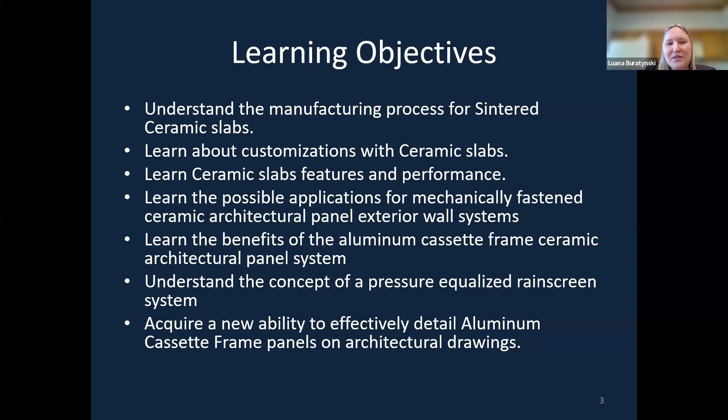In our objectives, we're going to learn the manufacturing process for sintered ceramic slabs, customizations with ceramic slabs, features and performance, possible applications for mechanically fastened ceramic architectural panel systems, benefits of the aluminum cassette frame which I mentioned before, and understand the concept of a pressure equalized rain screen system and the ability to effectively detail aluminum cassette frame panels on architectural drawings. So I'm your presenter today.

Thanks, Mark, for your introduction. I'm a huge CSI supporter. I am a certified technical rep, so it's the Canadian equivalent of the CCPR exam, but I will be taking that in my future.

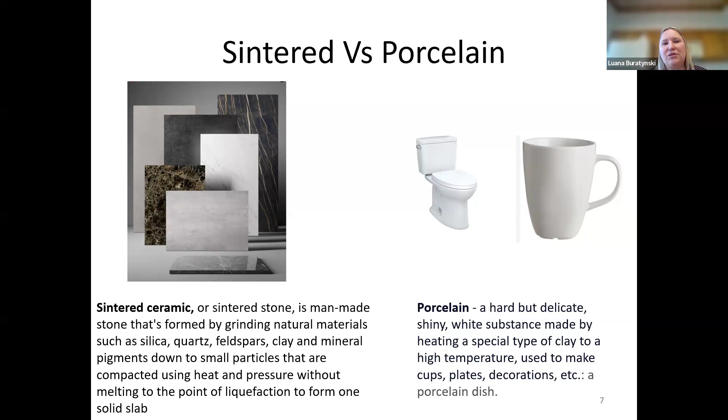When we look at porcelain, we think of a hard but delicate, shiny surface - heating a special type of clay at high temperatures used to make cups, plates, decorations, toilets, mugs - and they do shatter; this is more of a robust surface. So I want to make clear the terminology used when writing specifications: sintered versus ceramics and porcelain type slabs.

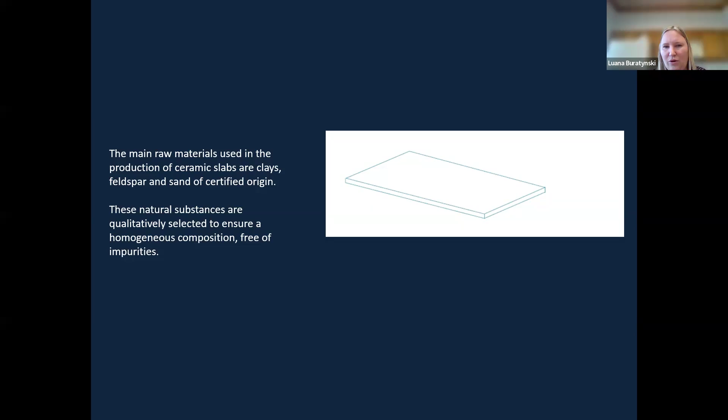Just to show you the process here: raw materials are used in the production of ceramic slabs are clays, feldspar and sand of certified origin. I'm going to show you the technology of the slab.

I'm going to load this up here. Make sure we get the video, and I hope the sound can play through. Get it another way.

I'll get back into the video once it loads, but for timing I'll show you how it's processed in the actual 10-step process.

The raw materials of silica sand, feldspar, mica, and recycled stone are all put in the milling process, where atomization mixes all the rocks and minerals together, and then they put it through high pressure pressing. There's trimming and drying, decoration with the printer, and firing of the kiln, and the final process is producing a reinforced fiberglass mesh backing behind it for quality control in the slab.

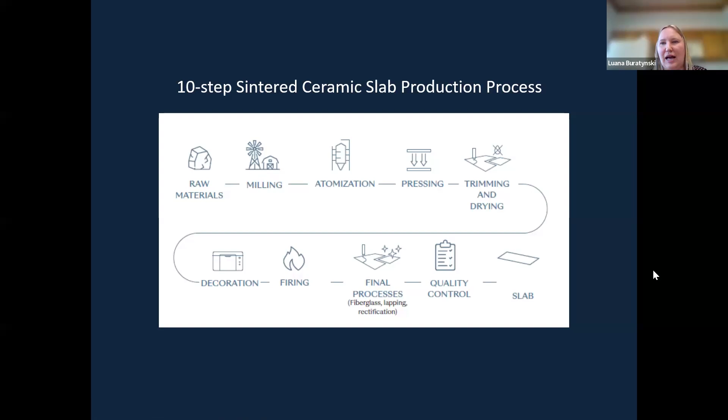What's great about this is a lot of quarries are being shut down in Europe for environmental concern reasons. This is something made from 20 to 60% pre-consumer recycled content. So in terms of LEED and environmental product declaration, this is more of a sustainable renewable material than actually using natural marble and stone from quarries - we're using a recycled process.

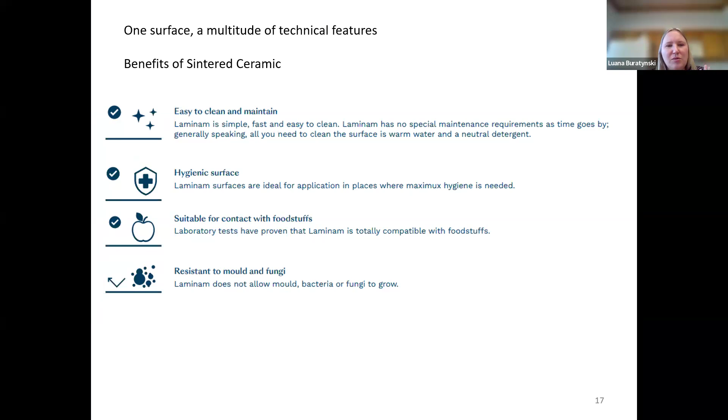The benefits of this type of material: it's easy to clean and maintain, hygienic surfaces, suitable for contact with food, laboratory tested, compatible with foodstuff, resistant to mold and fungi. This does not allow mold, bacteria, or fungi to grow on it. It's an impervious surface, just like glass, with a porosity averaging 0.1%.

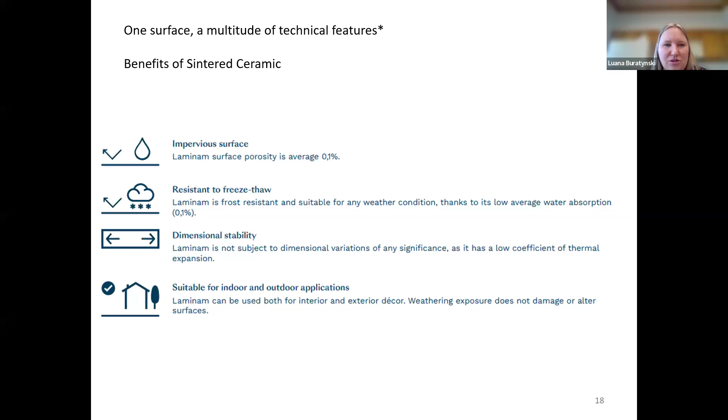Resistance to freeze thaw, especially in colder climates, suitable for any weather condition, thanks to its low average water absorption rate. Dimensional stability - it's a super flat surface with a low thermal coefficient of expansion, suitable for indoor and outdoor applications. You can consider this product in bathrooms, stalls, wall cladding, in interior and exterior applications. Weathering exposure does not damage the surface. Resistance to heat, so it's non-combustible. The ceramic surface does not contain any organic materials, so it's not altered in case of direct contact.

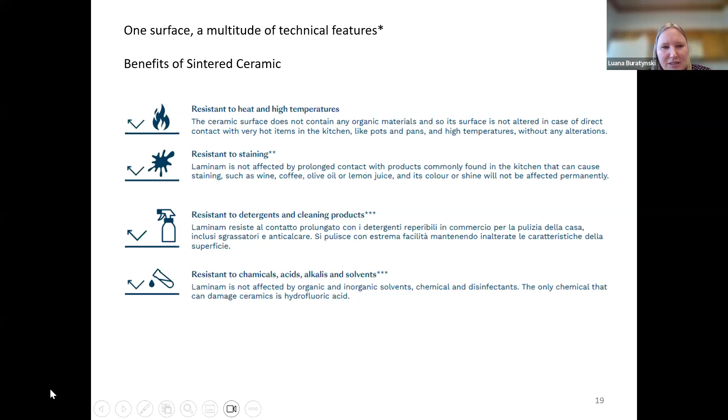This has the ULC 135 test. Resistance to staining, it's not affected with prolonged staining, and graffiti, so that includes like a wine spill, marker, spray paint. Resistant to detergents and cleaning products, so it just needs limited soap and water detergent to wipe off some of the stains that get put on it. And resistant to chemicals, acids, and solvents that could happen on the facade.

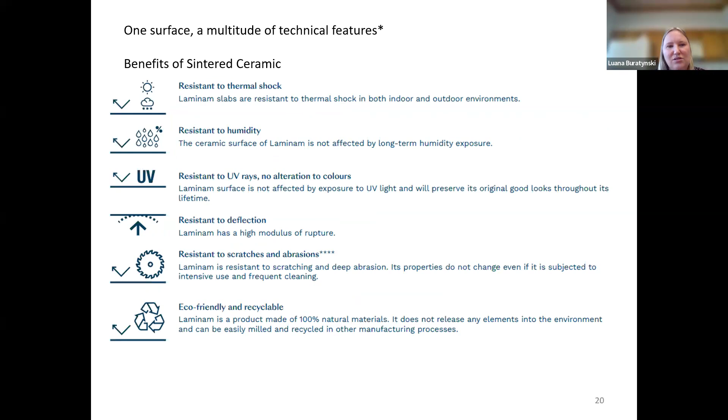So thermal shock is another one. Humidity, which is great, there's so many. UV resistance, so the color does not fade. There's a guaranteed 25-year warranty pass-through, but the color stays together. Resistance to deflection, scratches, abrasions, and it's eco-friendly and recyclable.

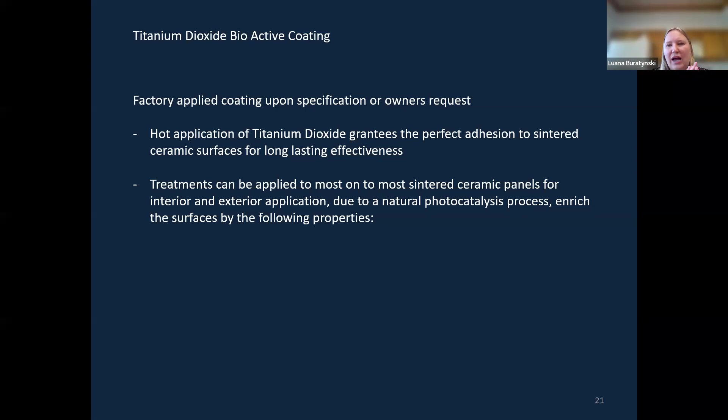So there's also an option here for a factory-applied coating called titanium dioxide. It's an additional additive to the spec that applies in the manufacturing treatment and helps allow for a natural photocatalysis process, which enriches the surface's properties.

So it gives additional air purification. The nitrogen and sulfur oxides and the activated oxygen create a reaction that occurs on the ceramic surface where exposed to sun rays, the oxygen species O2 and OH break down oxide polluting materials, making them harmless for the environment, where gases are converted into water, carbon dioxide, and soluble salts such as nitrates. Through this breakdown of polluting materials, this treatment causes a significant improvement in air quality and cleanliness.

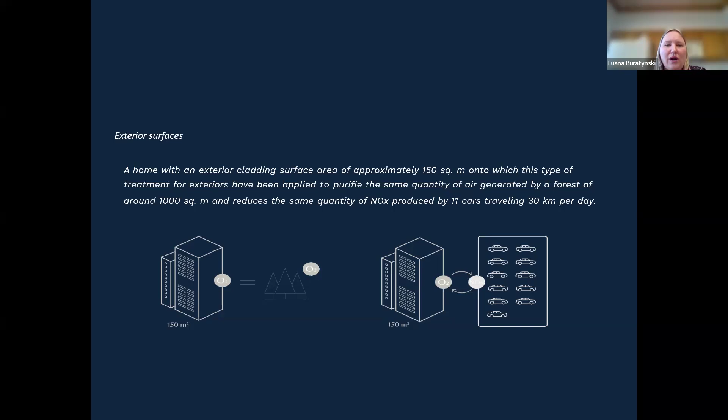For exterior surfaces with home cladding, at home or commercial uses, with a surface area of approximately 150 square meters, this type of treatment for exteriors has been applied to purify the same quantity of air generated by a forest around 1,000 square meters, and reduces the same quantity of NOx produced by 11 cars traveling at 30 kilometers per day.

So self-cleaning as well, generated by the combined action of the sun's rays and titanium dioxide applied to the sintered ceramic surface, decomposes a vast series of organic substances due to accumulations of dirt and smog. A lot of times people have a budget to clean the windows, but no one cleans the cladding beside the windows. The self-cleaning agent allows every rainstorm to wash carbon dust and dirt off itself.

Antibacterial: the photocatalysis is a powerful oxidation process capable of preventing the formation and proliferation of bacteria, molds, and fungi on surfaces treated with this treatment. The active oxygen species attacks pathogens and transforms them into molecules that are not harmful for health.

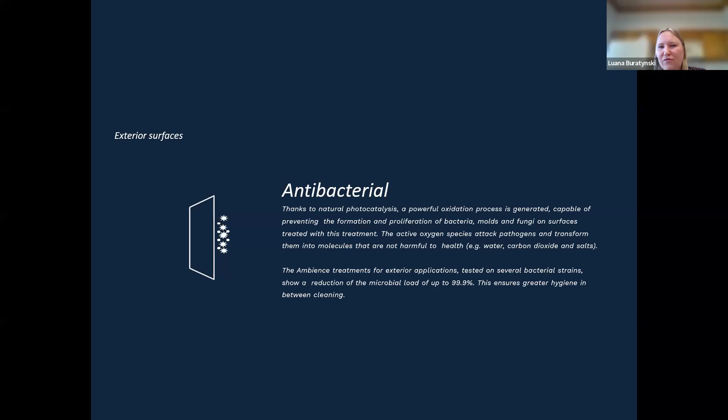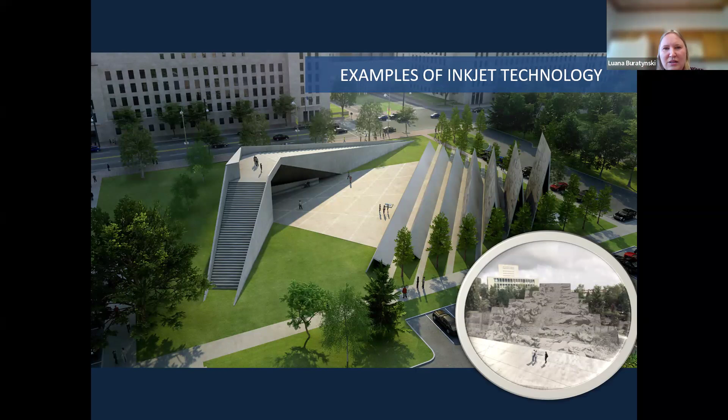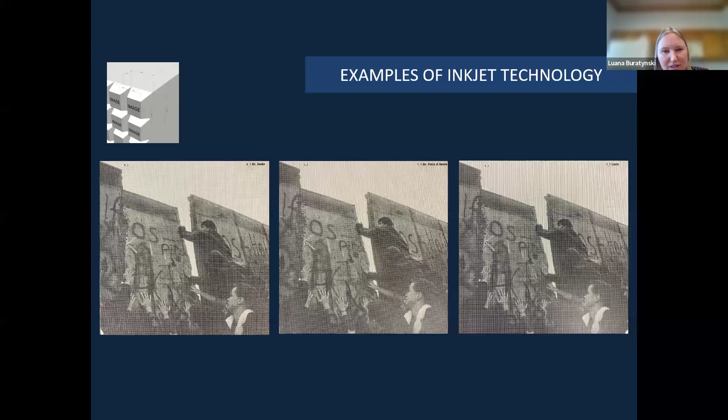Examples of a monumental type of design you can use with these large format tiles. And again, the images are getting better and better. So this was captured as a presentation of a memorial project, but if you have any current designs, we can look at it. There's a minimum order quantity involved, but we can do complex images.

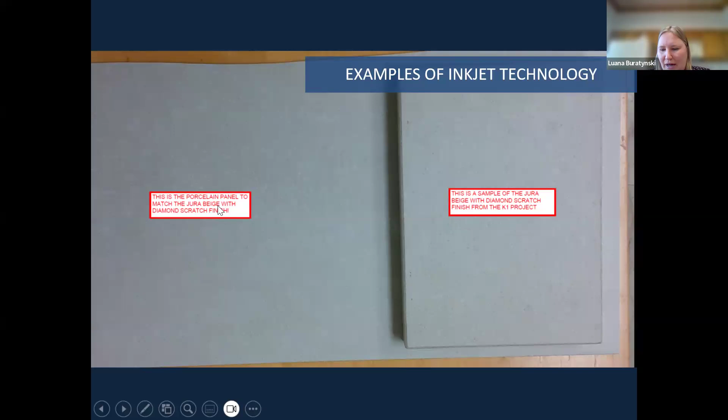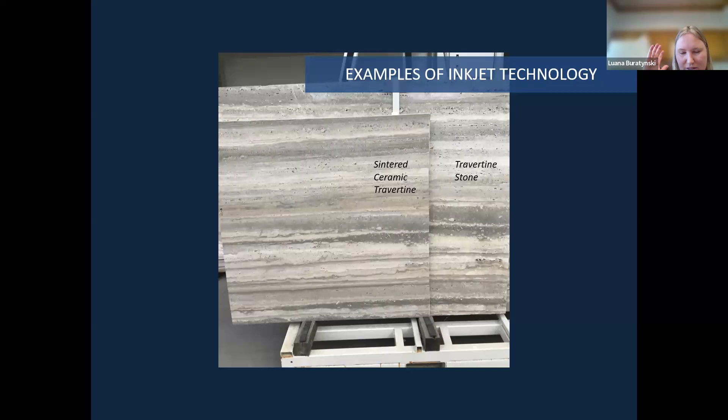Here's another example showing a porcelain panel to match the Jura Beige diamond scratch finish. So this is an actual stone, and this is the tile printed to match an actual stone. Pretty clear here, and again, travertine stone. Here is the digital image with indentations in the sintered ceramic stone tile to imitate travertine stone. And when you look at it on a wall, it looks very identical. The print is phenomenal.

Can you back up to the picture where the people were at the wall? Right there, how is that? How does that transfer? How do they transfer that to that application? Because that's pretty, that's not just a pattern, that's a real picture.

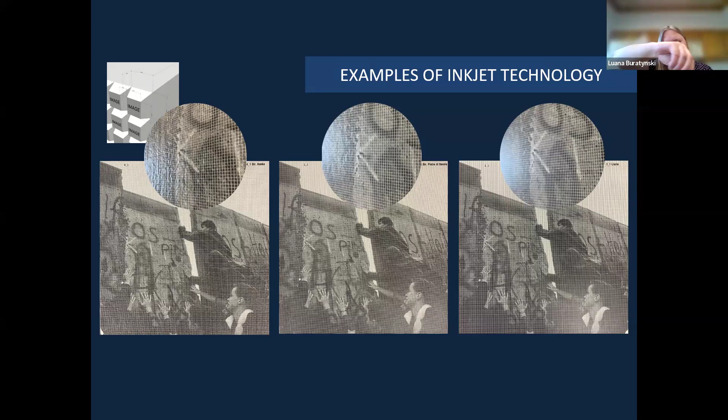Great, that's digital inkjet technology. That's why I was trying to get the video to show how it goes through the pressing, the hybrid kiln, and then the digital printer comes in and they roll out all the pigments in a certain pattern to achieve that image. So it's baked in the stone.

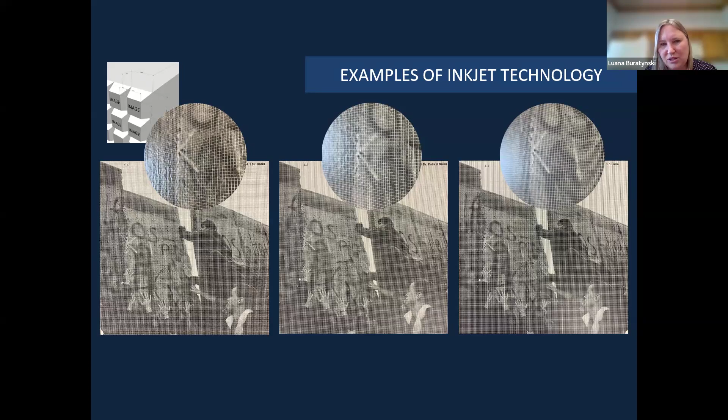And you'll see that with other marble veins. So this is custom printing technology with different types of pigments layered to achieve this look.

And again, same thing with the marble vein. A lot of the sintered large format ceramic manufacturers out there have book matching now, so you're not getting a repetitive pattern on the wall, you're getting an extension of a pattern. And with that gentleman there, these are large format slabs, so you can see the scale. You're using less grout and joint lines. In terms of a rainscreen panel system, you're able to clad larger areas of sheer walls with a beautiful aesthetic that imitates stone. And this video here shows the breaking strength of a traditional tile versus one with fiberglass mesh backing.

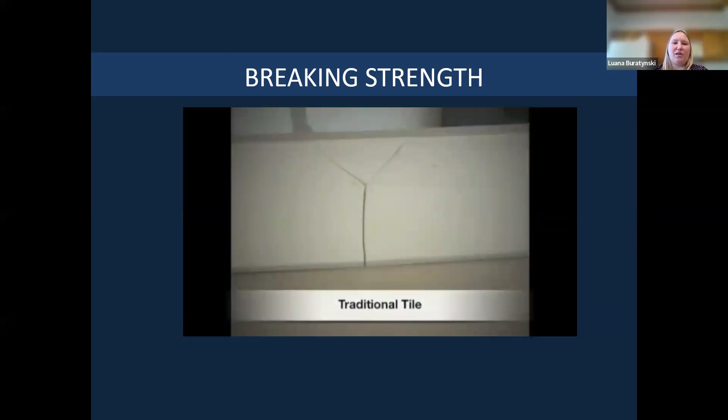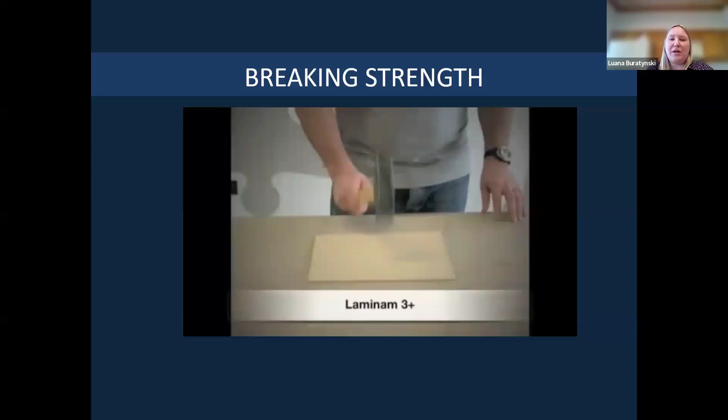So right away, those tiles shatter completely. Again, this is another tile with no fiberglass mesh back, 3mm thick, mind you. And this is another one with the 3+. So we actually carry 5.6, a little thicker tile, or 6mm tile with the fiberglass mesh back. But watch how many times he hits it before it impacts. And the impacts are minimal.

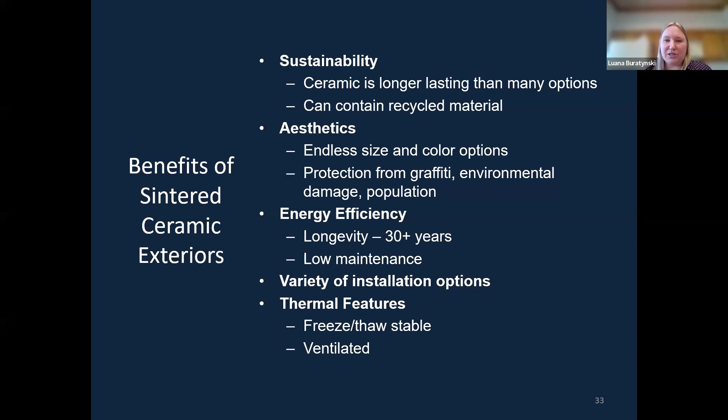So just to recap on the benefits of sintered ceramic exteriors, choosing this type of material for your facade. When you're considering fiber cement, high pressure laminate, different types of materials outside of metal, this is also a new consideration for your design assembly. It's long lasting and has environmental product declarations for 20 to 60 post-consumer content. Endless size and color options, protection from graffiti and criminal activity like markers, especially for high traffic areas and transit. It's dent resistant, impact resistant panels, longevity of 30+ years life, low maintenance, variety of installation options, freeze-thaw stable, and ventilated.

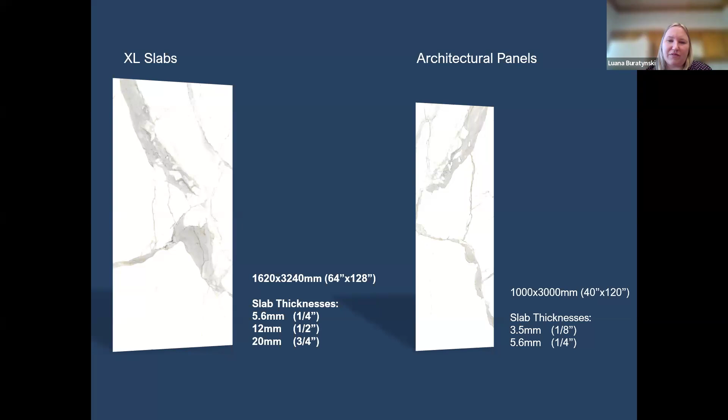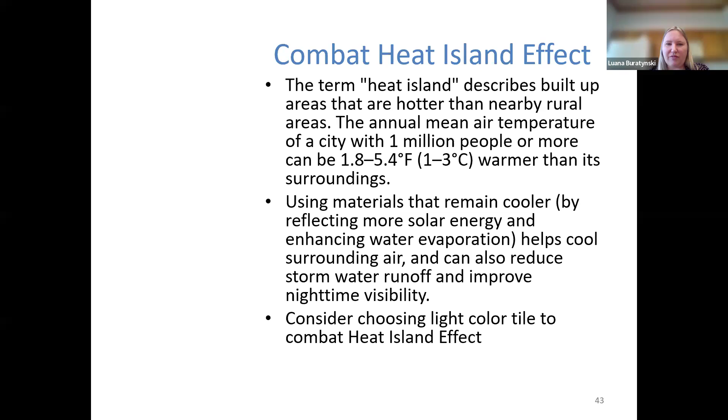Another reason I want to talk about is the heat island effect, especially for built-up areas that are hotter than nearby rural areas. The annual mean air temperature of a city with 1 million people or more can be about 1.8 to 5.4 degrees Fahrenheit warmer than its surroundings. Using materials that remain cooler by reflecting more solar energy and enhancing water evaporation helps cool the surrounding air, reduce stormwater runoff, and improve nighttime visibility. So consider the heat island effect.

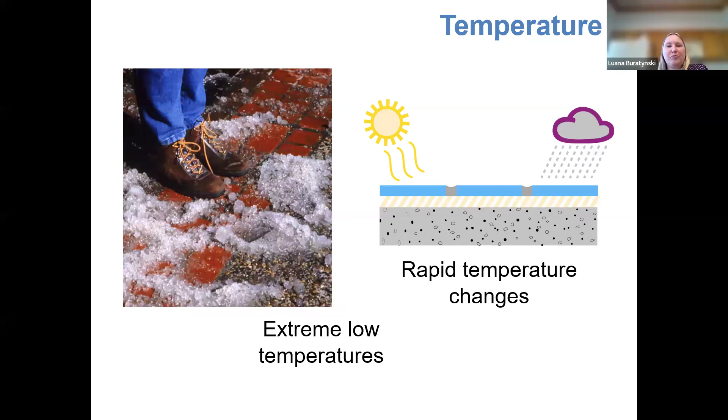I have a job right now I'm working on that just passed with the city of Toronto. The whole building is being replaced because the majority of the tiles popped off like this, and we're recladding it with a mechanically fastened rain screen system on that type of facility.

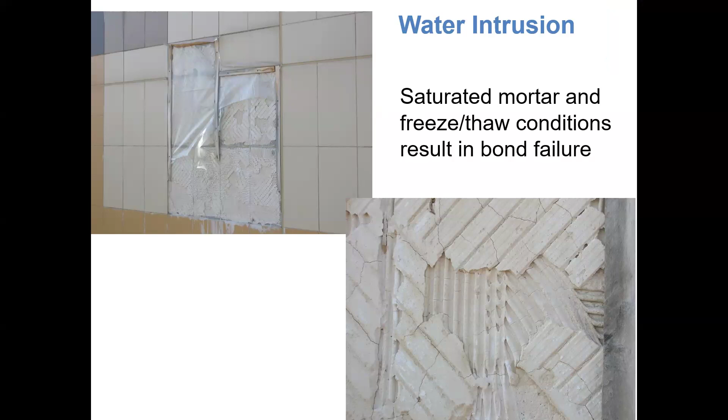We got a question on protection: how does the material actually protect against anti-graffiti? Is it basically cleanable, like a wipeable surface? Is it the same type of technology as paints, just on the panel? Yes, yes. It's baked into the stone, so it's an impervious surface. When you write on it with chemicals or markers, you just need a mild soap and detergent and a scrubbing method to clean it off.

There's procedures and it can wash off, so you don't have to repaint the tile or anything. It does come off, and it would be great.

I normally have a test where we put wine on it, we put marker, we torch the panel in a live demonstration, and we get a screwdriver too, and we hack it and you can see sparks fly. It's pretty scary, but you can see the marks on that. The live demos, I used to come out with my screwdriver and really show you how you hack it out.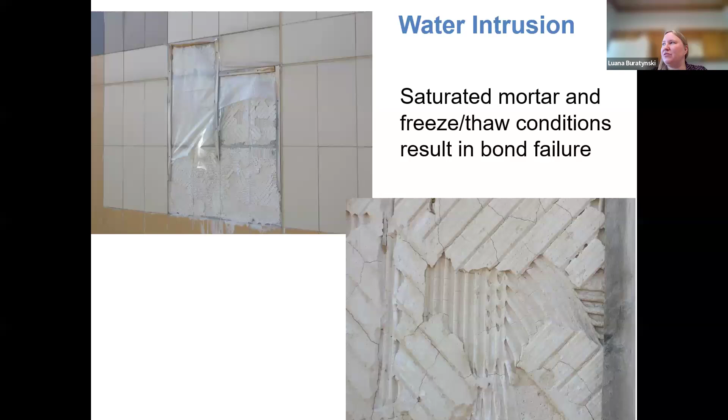So it's a robust surface, especially for high areas of impact in traffic.

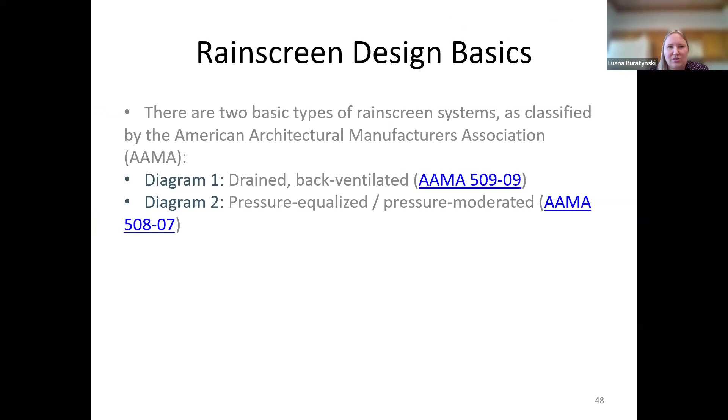I just want to highlight rain screen design basics. We're members of the Rain Screen North America Association, RAINA, and there are two basic types of rain screens as classified by the American Architectural Manufacturers Association: the back ventilated rain screen and the pressure equalized rain screen system.

A well-designed, tested, and back ventilated rain screen can stop over 90% of the water that could potentially reach the air and vapor barrier of the building, and the remaining less than 10% of the water is gradually dissipated through the combined actions of gravity, drainage, and air circulation evaporation.

The pressure equalized rain screen systems completely prevent water from reaching the building's air and vapor barrier by compartmentalizing the cavity. The system I'm trying to highlight is aluminum cassette frame systems, where wind enters through the joints of the cladding and instantly fills the sealed cavity compartments of the wall behind it. As a result, the compartment's pressure equalizes to the outside pressure, and the rain can back vent and drain out.

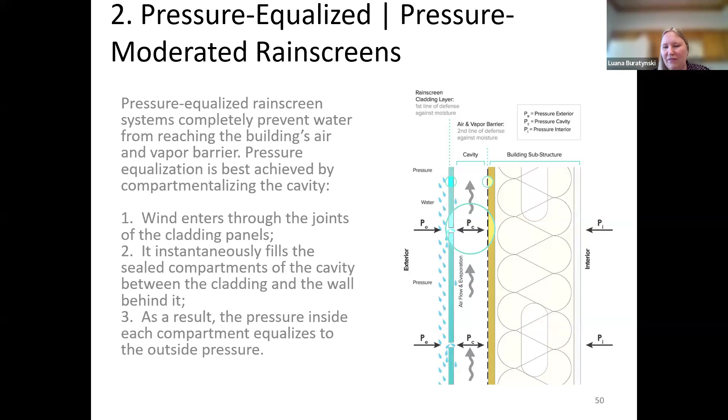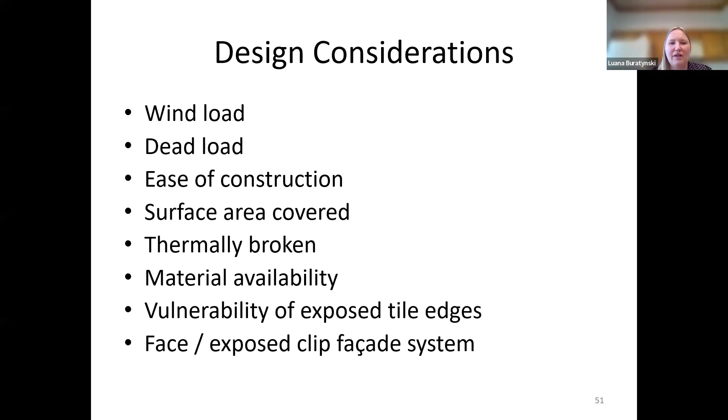And face fasten or clip exposed systems. I'm just going to show you a type of cladding systems on the market today: aluminum picture cassette, hidden system with longitudinal adhesion, visible mechanical fixing, and a mixed hidden profile system.

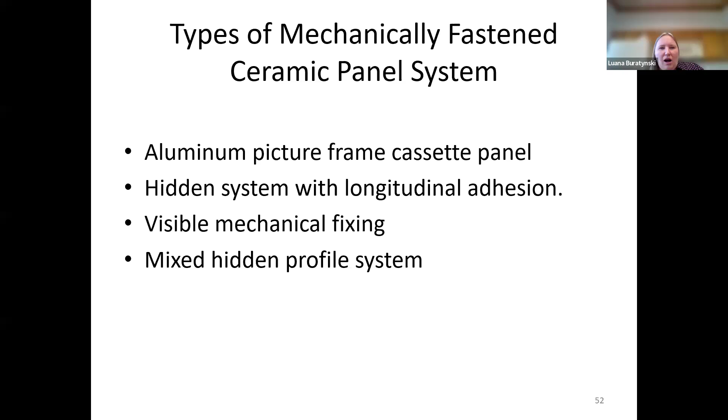There's a lot of companies in Europe that have machines to build out the tile, and they're promoting their own facade systems. Some of them are not regulated yet to meet building codes in North America, but there's quite a few that are tested here and passed a lot of the American tests. So make sure when you look at these type of systems, they are built to code requirements in North America.

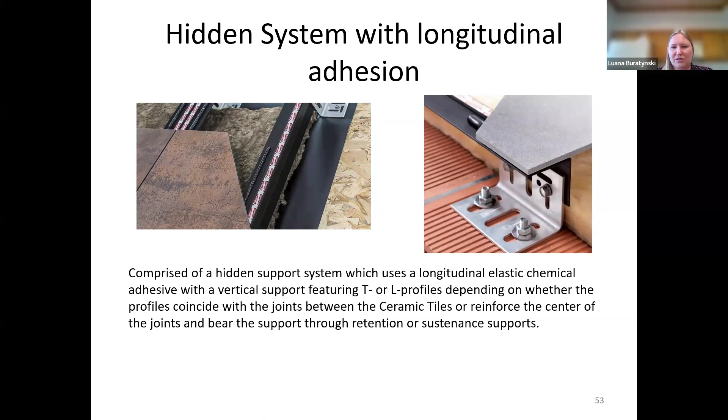This is the longitudinal hidden fasten longitudinal adhesion system, where it uses elastic chemical adhesive, probably like butyl tape, as well as silicone and vertical supporting T- or L-profiles, depending on whether the profiles coincide to the joints of the ceramic tiles, reinforcing the center of the joints and bearing the support through the retention and sustenance supports.

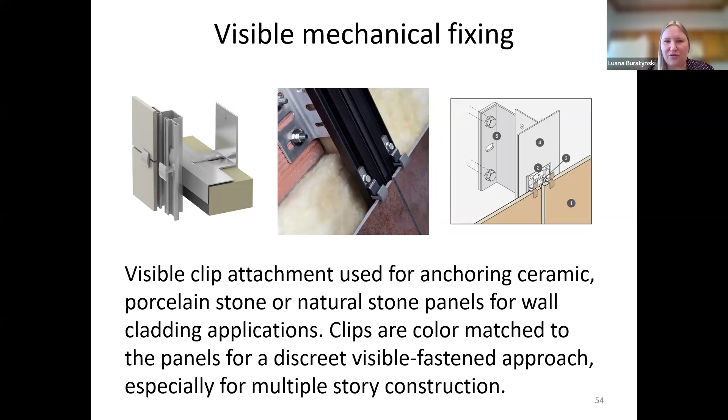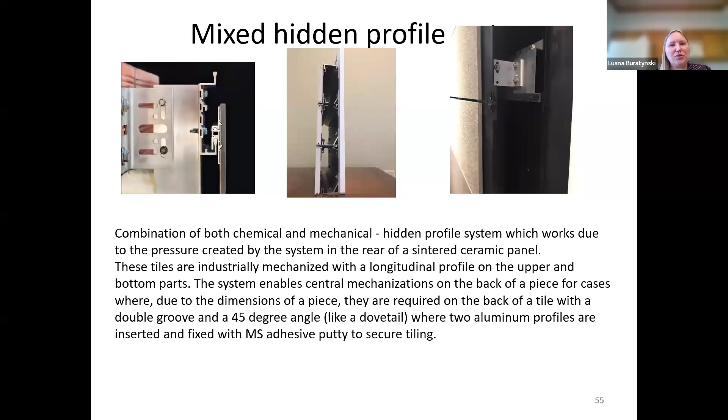So what I'm showing you today are different mounting options of the different tiles.

A lot of times we try to promote back to this type of method system, the aluminum cassette frame, because a lot of installers out on the market are so familiar with installing aluminum composite panels, they can easily interchange with this type of system on the same rail subframing, because you're using J-trims, clips, and spines.

So to form modular panels, we use a minimum 3.5. We would recommend the thinner tile on a second story above for less impact resistance, and the 5.6mm tile on ground floor for impact resistance purposes. It's always specified with integral fiberglass mesh reinforced backing, done at the factory application depending on which tile supplier you select, for strength of the tile. The extrusions are painted any PPG Duranar color to complement the tile.

The ceramic slab is then structurally bonded in an aluminum picture frame panel, and it's backed onto either Z-girts or an intermittent clip and rail system for thermal breaks as shown here. You're making sure that it all calculates with current project design and wind loads too.

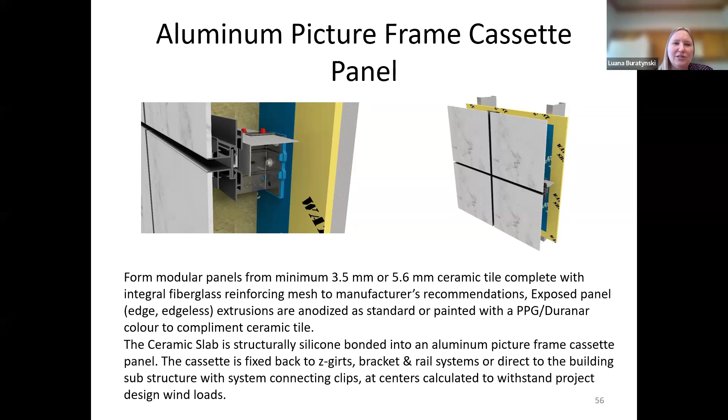So engineering is involved. Here's a showing in the shop of a picture frame cassette panel, which ensures there's stiffeners and it's not vulnerable to chipping because it's a fully enclosed panel.

Here's a mock-up wall in the shop showing you the different components of how the system is built, incorporating the beautiful tile in the fabrication system. So you have the aluminum panel clip.

Yes, Mark? Yep, just had a couple questions pop up. Have you seen any applications, or is it an application that can be glazed into traditional aluminum storefront framing or curtain wall framing? Absolutely. And I have a detail to show you that.

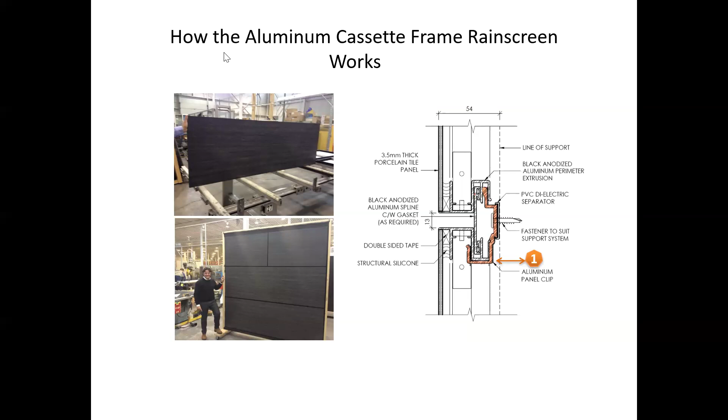Okay, and then one question, is this similar to a product known in Europe as the brand name, let's say Dekton? Yes. Okay, so that's an excellent point.

So, large format sintered ceramic tile manufacturers - as a manufacturer, I have a great relationship with Laminam, but there is Dekton, there is Neolith, and Laminam you'll see on the market. We can put other tiles into our system, whether it's Laminam, Neolith, or Dekton. Those are all qualified manufacturers that we would work with based on deliverability, quality in the manufacturing plant, and coming into North America that's already tested their tile for compliancy.

And we test our system around that, right? So right now my system that I'm highlighting today is tested with Laminam, but I can accommodate Dekton or Neolith in here as well. A lot of this is driven by the architect or owner's preference of the look of the tile, and then we put it in our system. It's all about the color.

So going back to the hardware of the fabrication component - similar to aluminum composite or plate panel style. You've got your panel clip, and your fastener that backs into the substrate of your traditional girt assembly.

This can be, if you don't need a thermal clip - let's say you're doing a retrofit of a building and you just want to cover up brick or precast - you can just overclad and have just a traditional hat channel and attach to it. So that's not a problem as well. I'll show you examples of overcladding projects completed.

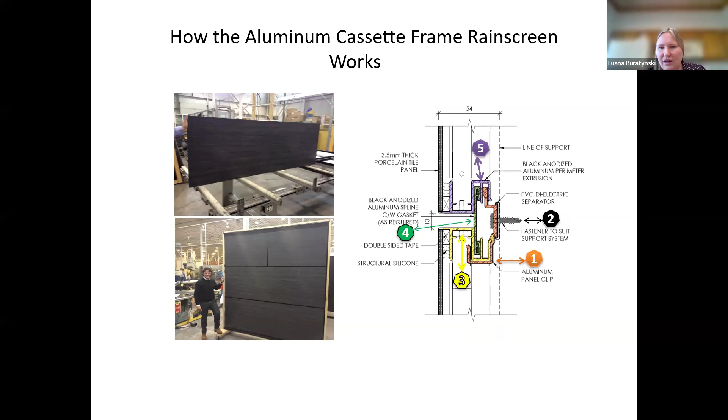And then again, the hanging on the panel clip of the system, looking at compartmentalizing behind the wall, behind the panel. So there's the panel clips that click onto the girt, and this just shows you the rain screen compartmentalization of the water and air vapor barrier being back vented and drained through the system.

Suitable for high-rise construction, and I'm going to show you some examples of transit. This was one of our massive projects - we've got 13 stations with the Ottawa Light Rail Transit, 100,000 square feet of material with aluminum plate panels as well, and also the glazing as well.

So just looking back, it's an alternative to solid stone, granite, marble, cementitious materials, natural metals, and fiber cement products. It's lightweight - the average weight on the 5.6 millimeter panel is about 6 pounds per square foot, and the 3.5 millimeter planks are 3 pounds per square foot.

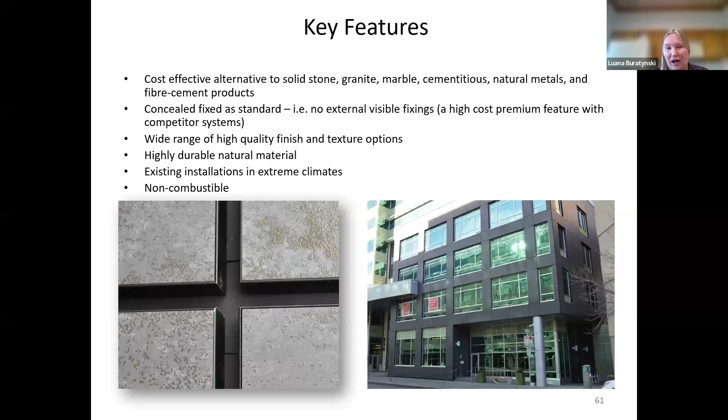You have a wide range of quality finishes and textures, durable natural material, existing installations in extreme climates, especially in the freeze-thaw and hot UV resistance. This is great. Non-combustible as well.

And we meet the AAMA 508, 509, ASHRAE 90.1 tested. It's lightweight and it's a modular panel construction, so very economical. You're covering a large surface area at a time when using the large format panels.

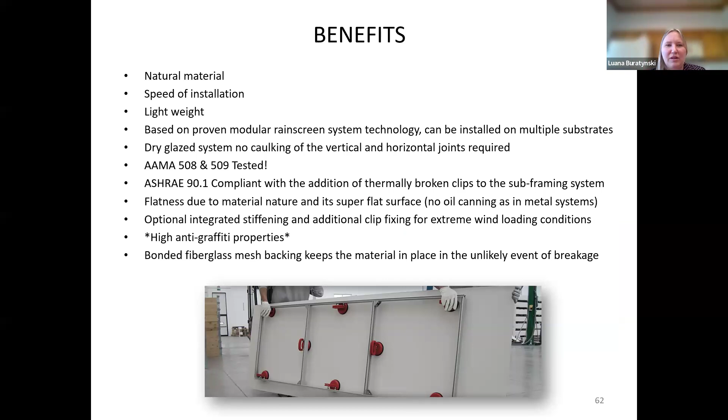And we always make sure it's bonded with fiberglass mesh backing to ensure breakage doesn't happen. So the joints, the aluminum frames can be black anodized as standard or painted any color to match.

And here's more building envelope testing, the AAMA 508, 509 rain testing, air leakage, standard testing for structural performance, and the ULC S135 determination of combustibility.

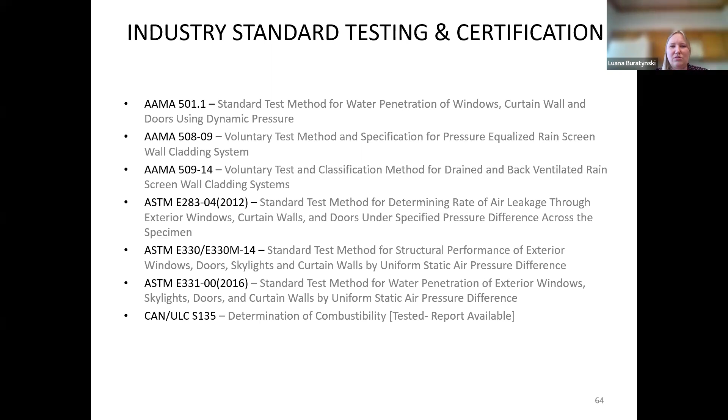So the video I was going to show you is the Laminam plant, but each plant has their own sizing. So when you're designing a tile, joint lines in your layout, and you're using one tile, and then other people, if you want a competitive bid space, want to come in, it might make a difference in pricing, waste. Joint lines might have to change based on the surface area of the tile compatibility to your current design intent.

So looking at that, best optimization is use the total surface area, ceramic slab, larger area, and so color selection and material availability may vary from design development, selected colors to actual construction executed schedule because of the long lead times when this gets designed during schematic design by the time it's awarded.

Majority of the stock colors are not discontinued, or there might be a change with some manufacturers, or they might keep the color. They have the digital prints, but that's where you buy the whole lot at the same time of production slot. So there's no slight variation of color.

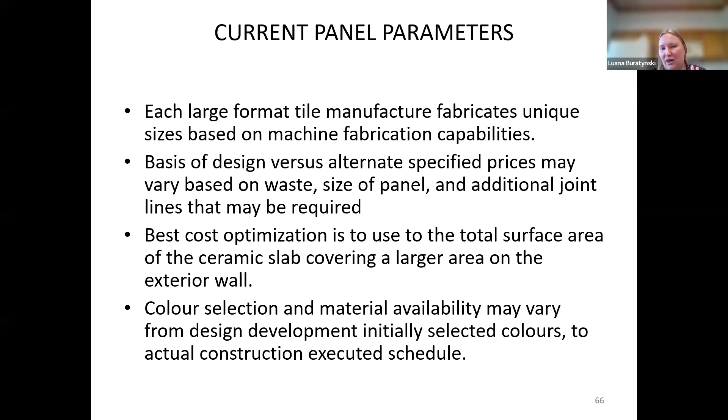You might see with a small trained eye that when it's printed with one batch line, everything looks the same. When it prints from two different batch lines, there might be some slight variation, but it's very minor.

That's another thing too. And here's your curtain wall setup for configuration using the large format panels. So we do have sizing and optimized layouts for spandrel panels, infill panels.

Beside that, I actually am working on a project right now where we're unitizing a medical building, a 5-story medical building, with attributes to some of the spandrel panels being inset Laminiam panels, and the rest are glazing high performance unitized curtain wall.

We are manufacturers of 6450 unitized curtain wall, and we work through supply only companies. So we have worked on large commercial glass buildings.

So I have a lot of engineering behind this panel system from our glazing division, making sure that this integrates well with either window wall or curtain wall applications.

And we have a lot of technical support that can help you during the design process, schematic design, and looking at your details, providing considerations of certain areas of where to place the panel, your joint lines, or detailing back like thermal breaks or different placements to hang the panels. We can review that.

It's all free of charge. You just talk to me, I send it back to my design team, and we can help you build out a solid set of bid documents that everything matches and aligns with the system, right?

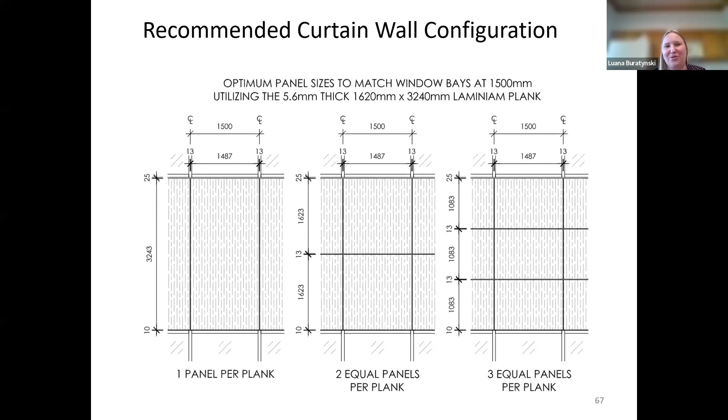So there's no variance. So in a perfect world, fewer RFIs, it's a clear drawing package and bid package that works through the whole system, right? And you get your design intent that you like.

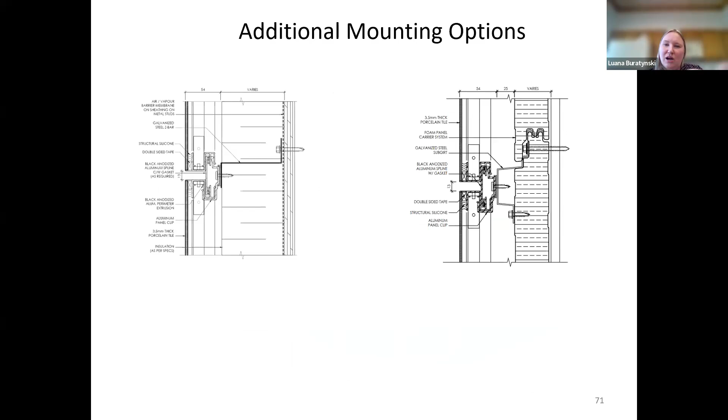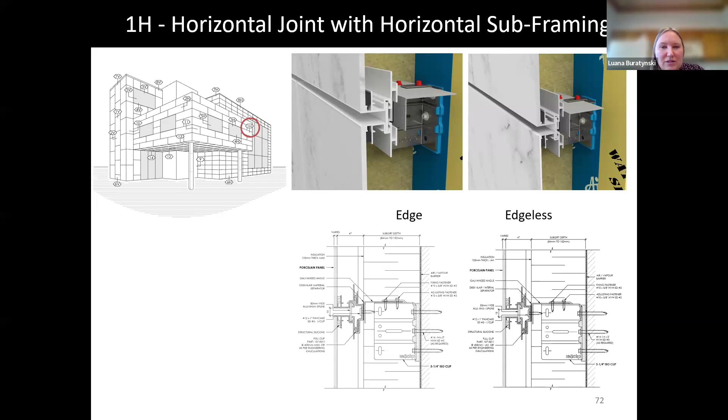And here we're getting into the nitty gritty of the typical details. So your typical horizontal joints between edge protected and edgeless, because we can offer the open joint. I have this all available in a technical library you can use, and this will help you consider on future projects.

Here it is again, vertical applications. Here's our vertical here with horizontal bars, and then you have vertical bars for the vertical joint.

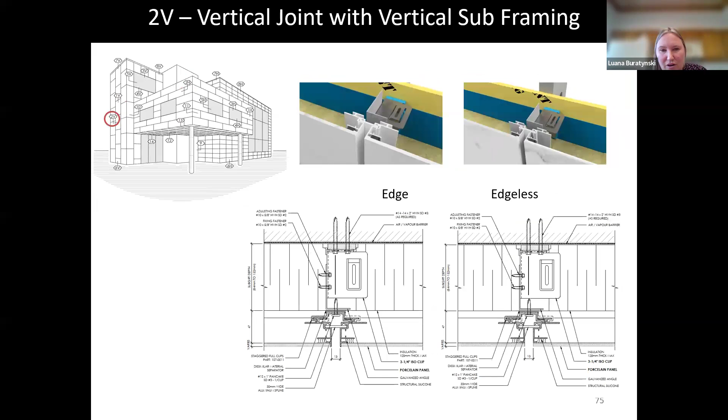Then we're looking at, especially for the glazed and curtain wall, this is our curtain wall system with the panel and a drip edge. So I have all these details set up with when to end windows, when to start openings, termination joints. And this is just one consideration.

I have other details for parapets, different returns on punch windows. So any of those questions, let me know, and I have different details and applications for that. Here it is again, below the window edge here, different types of applications.

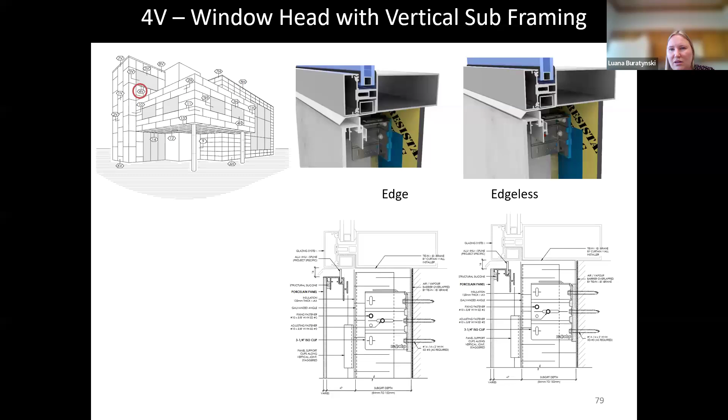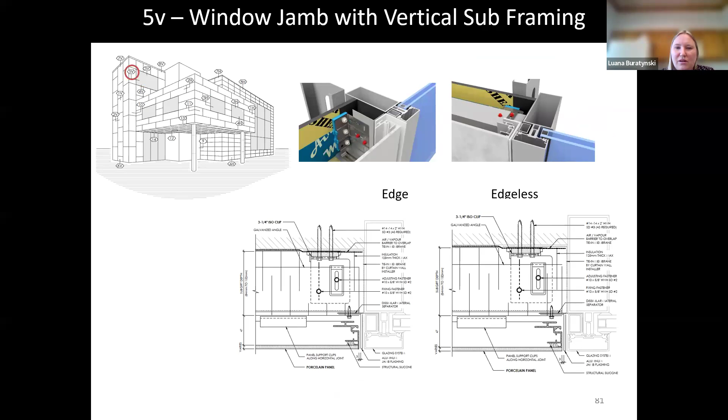I'm highlighting this, so I have all this available, even our renders if you'd like to use it to show the client how this all works and comes together. It's great to put a 2D drawing into 3D and show the details of where it's going.

And again, base details, we never go below grade. We're always slab on grade.

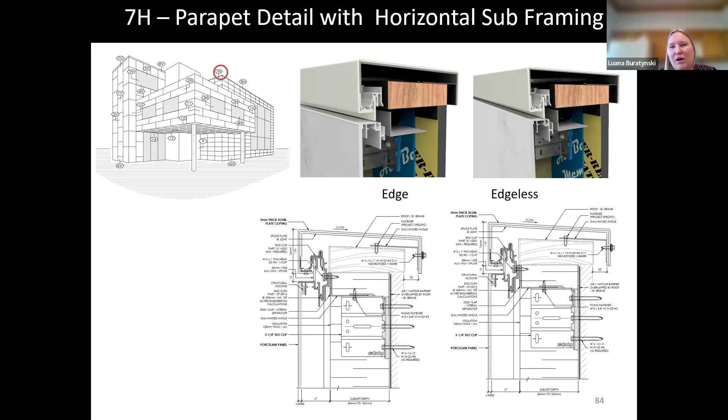Parapets. So I actually have details now where I can do a 3-sided panel in all ceramic porcelain. It is more costly. This is typically aluminum cap flashing or metal panel, but I can do this all in ceramic as well if needed.

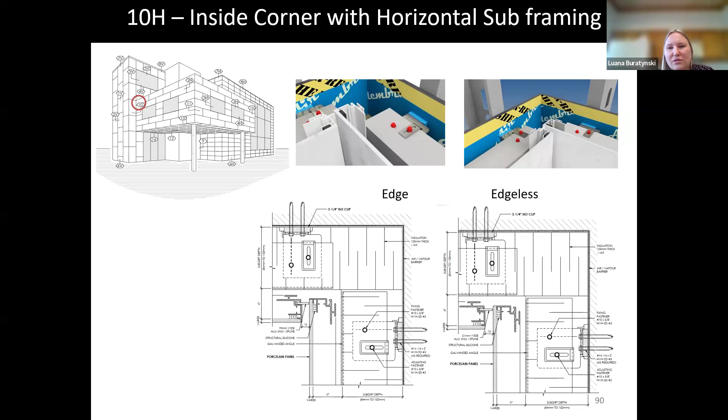There's a cap flashing, again a termination wall joint that nicely butts in. Inside corners, outside corner details. So this is great.

So you can see we love our mitered corners, it looks the nicest, but you can do butt ends, you can do a metal cap, you can do an open corner joint. I have details for all that depending on what you like to design.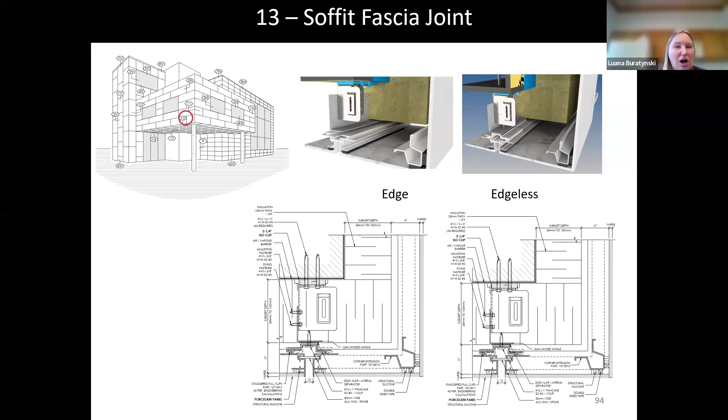I can't hold on signs, but I can drill holes in my panels to allow for extra structural support to put the sign through the panel system. Or if you have utilities like pot lights, security cameras, louvers, and vents, that can all be cut in the shop or on site as well. I'll show you those details further as we keep going.

And looking at 3-sided panels, this is just a mock-up panel in our shop.

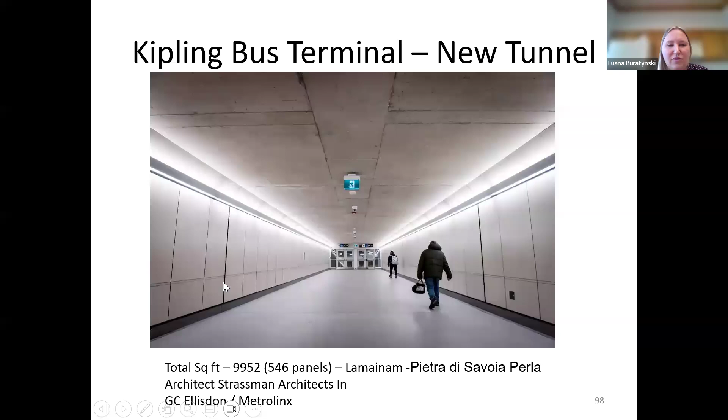Here's more applications. This is a great one to highlight a recent tunnel we did. It was a bus terminal connecting two sides of the road together for the transit, especially for dent-resistant applications. I know it's just basic white plank, but this is 9,000 square feet of impact-resistant, mechanically fastened system, so it allows for moisture draining and securing with the wind tunnel.

And I found a YouTube blogger that walked through it recently, and I wanted to highlight that. You get to see the large impact, especially in other spaces. You don't think about cladding in parking garages, underground tunnels, accessing. You don't have to worry about dent and graffiti resistance because these panels are secure and off you go.

Luana, what kind of, and I know it's going to vary on application, but for a typical application, say what we're looking at here, these wall panels and such, what's a normal lead time on something like that? Say from, I mean I know we've got submittals and reviews and all that, but from a fabrication point, once the stamp goes on the submittal and says we're good to go.

Based on the material, and with our manufacturer that we partner with, they actually have a North American head office that imports tons of slabs for North America distribution. So we either pull locally if they have it already imported, or we have to buy a new batch to be made. We deal with Italy directly, so we'll call and say, when is this one going to be ready to crate and come over? In 2 to 3 weeks, and then allow that time for the cruise ship to come over.

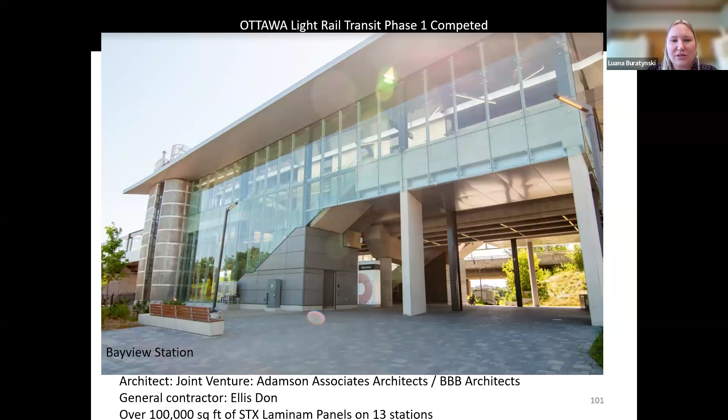I'm showing this massive project because there are 13 stations, lots of work, lots of details, utility spaces. Especially with government buildings like snow removal facilities and utility services, this building needs impact and dent resistance. With siding or metal panels, great cost-effective work, but these trucks are in and out banging stuff. I've had so many jobs, because I'm a metal panel manufacturer myself, where I'm remaking panels - great work for me, but not at the owner's cost.

Look at all the holes cut out here for canopies, lights, security, ventilation. Also, large format 1 by 3 meter planks are utilized on large transit stations, especially public indoor-outdoor facilities, since wind is a big issue in a lot of these projects.

I'm going to get into some other applications because this is all transit - there's retail, there's commercial.

Going through the magnitude, these are all the different types of stations that were built. One thing to note, we can do segmented curves. If we're going to do a curved application, we would probably need a stone honeycomb and a different material, but this is segmented curve applications, as you can kind of see here with the redo part - again, utilizing large format on all these stations.

I want to get you some cooler stuff now.

Are there any plans for a North American manufacturing facility? As you know, I have 5 manufacturing plants - one in Salt Lake City Utah, Kansas City, Vancouver, Winnipeg, and Mississauga. Right now, the majority of work for this panel system comes out of Mississauga, Ontario, but I do have access depending on location, like our Salt Lake City Utah and Kansas branches as well.

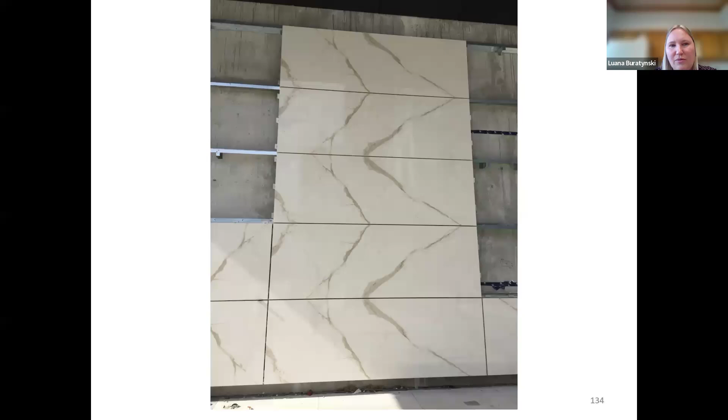Are the rough-in locations, say where electrical boxes need to come through the backside, put into the panel, or can those be field cut? They're field cut. A lot of it we try to recommend through the shop drawing process - if it's ready to measure, we can put it in at the shop, but if not, they can be field cut to allow for this type of stuff.

What kind of process or considerations need to be taken when you cut a panel like this in the field? You're using a diamond cut blade, a hand drill, and it would be an experienced cutter assigned from the cladding contractor to do this.

Also, this panel system is not a structural support for the sign. You need to allow for additional HSS and miscellaneous metals to support the weight and dead load of the sign through the panel system, drawing that in there for support.

And that's our corner, a miter corner, showing how the marble vein and the book match can match all the way through on the sides.

Another job here for high-end retail - this is a job in Toronto, so Versace ended up being the tenant, which is really cool. And this is it being installed, modularized with that other client in a mid-rise retail area.

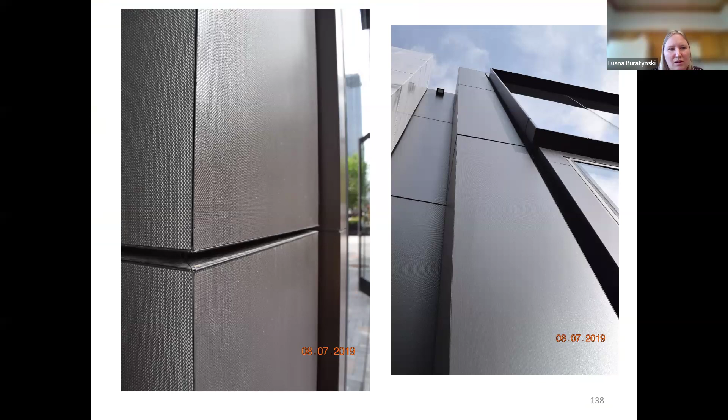Here's another one - when you look at buildings that are predominantly brick, adding a different element of facade materials. This has a lot of punch windows, brick facade, and we used our large format ceramic tile to achieve this look. As I move closer, you see some parallel angles because our system is very rectangular - we can use honeycomb behind the panel and make angled cuts to achieve this type of look in a large format setting.

Especially in this little fun enclave, you can see the angled parallelograms, achieved through a honeycomb backing with the ceramic tile bonded onto honeycomb and a clip and rail type system. That is also custom - we can do it, but it has longer lead times because it goes through another process: the tile gets made, then the honeycomb process, then we apply the clip and rail system.

With ours, the tile is made, the frame is assembled, and it goes to site. There's a bit longer lead time for this type of material, but it's achievable, and that's one of the projects we've completed.

This is one of our first jobs we did, and it's still standing today - just a little area here.

Another one with curtain wall behind it - that's our 6450 curtain wall, and the gray area is our cladding system with an open corner there. You can hardly see it, but it's an open corner.

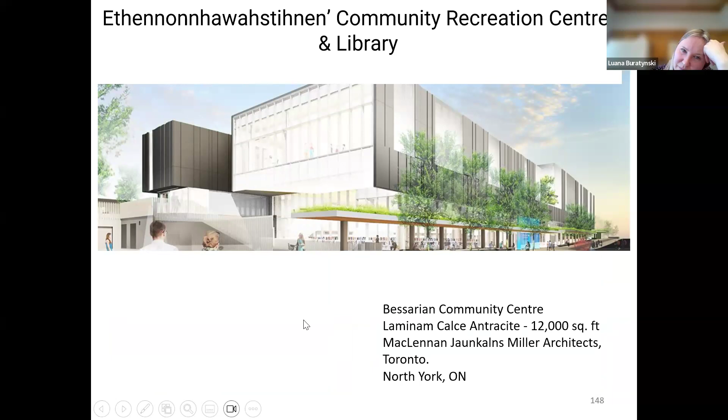Institutional, especially for government jobs, we're really grateful that we get a lot of... oh, that was drone footage. I don't know if that's gonna link to my YouTube video. Oh, it is. Oh, great, that one works.

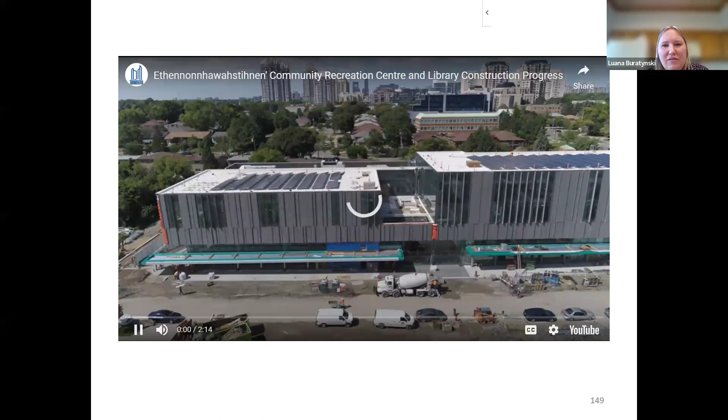This is great because you get the scale drone footage of the mass capacity of a community center. So we're really reinvesting back into our local towns, a lot of native and indigenous community centers. This is one we've partnered with MJMA Architects.

One side of the wall was all sintered ceramic and the other side was curtain wall. This is just a high level look at our wall system here on a completed job. It's also carbon neutral because it has solar panels and is energy efficient. It's a nice scale to show if you're thinking about libraries, universities, or institutional projects, this is a great material. Especially now, local governments and states want to invest in the long-term livelihood of the building, and this material stands the test of time. It's going to be here for a while.

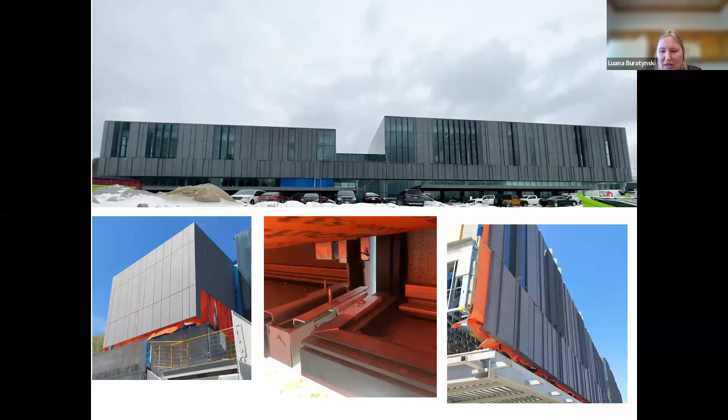Oh, that's nice if it gets closer. Oh no, that's just a high level thing. Let me get here and I'll go into... oh, there it is. There's construction of it, so now you can see the returns of the panels, how it's underneath, how it's fabricated in this cassette frame. Back ventilated rain screen is a preferred choice for these type of large scale projects.

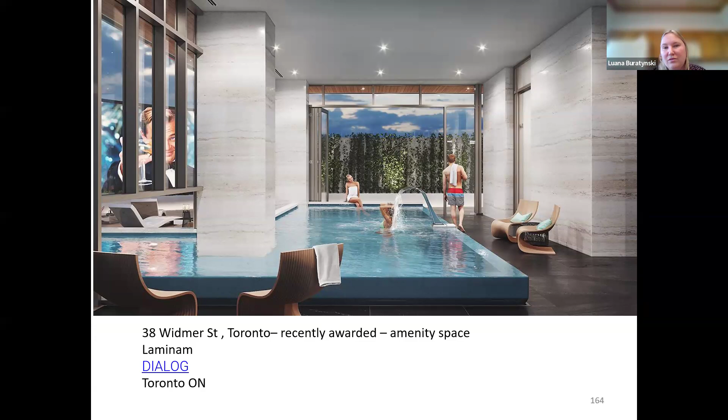Another use is amenity spaces. You can clad this for indoor and outdoor amenity spaces and it looks beautiful. This is also under construction right now. I love how they put the Wolf of Wall Street in their rendering, that's different.

But that's another aspect, using rain screen cladding in amenity spaces, especially where pools are.

And just to recap, the manufacturing process for sintered ceramic slabs is state-of-the-art and environmentally sustainable, with various options for customization. It's the next generation for high-performance exterior facade systems. Because this is a new product, I'm showing you where we're at with the market. Getting a full high-rise tower is often due to the owner's cost constraints, because it is higher than traditional metal panel and wall assemblies. But for mid-rise commercial buildings, this is great, especially if you're looking at condos and want to invest in a long-term facade, this is a great product.

Material costs vary based on how you design the building. So if you want me to provide high-level budgets for considering this application on your next facade, I can totally provide high-level budgets to see if we even fit in, and give recommendations on other options as well if this is not the right product that meets the budget.

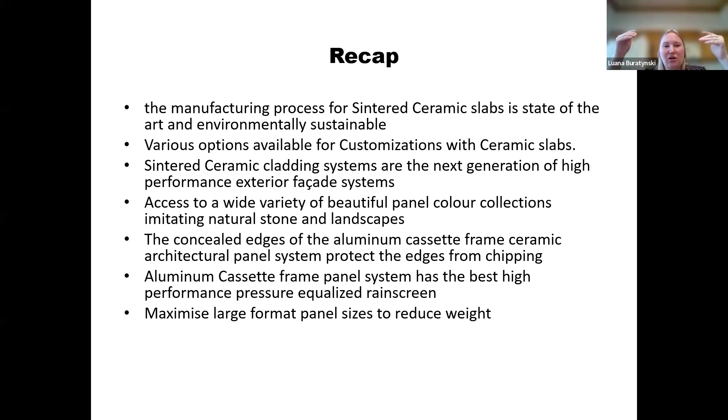We're typically in the same ranges of fiber cement material costs, but it's all a matter of getting in early and seeing if this is the right system for you, and maximizing the large format panels is a big thing to reduce weight. And why we chose aluminum cassette panel framing is because the process is easy for majority of the cladding contractors to pick up and install. It typically takes a 1x3 meter panel 2 guys to install, but once you get going, it's very easy to install, and you're covering a larger surface area on a wall itself.

Any other questions from the team? Let me look through the list here. One project, I'm surprised it wasn't in here. I have jobs completed in the States. We're almost done with Muckleshoot Casino. I showed this at the last CSI conference a couple years ago. This really cute center, I don't know if it's in here. Just checking my presentation.

Another thing I showed a lot is thermal clips. To get a system that's code compliant, it's really good to think about how well your total system is performing. We do offer a thermal clip to meet ASHRAE 90.1 compliance. So that is something, if you're looking at a higher performing thermal building that's going to be carbon ready, or you have targeted R values higher than R15, R25, the intermittent clips and rails, thermal clips should be considered in your design path and working with the bigger team.

So you have the cladding manufacturer, the fabricator for the rain screen panels, the tile manufacturer as well, and then the thermal clip manufacturer, and also your air vapor barrier and the type of insulation you're selecting to make it a whole unified system approach when you look at the wall cavity itself. So if you need installer level supply and install budgets for the whole wall cavity, I can do that as well.

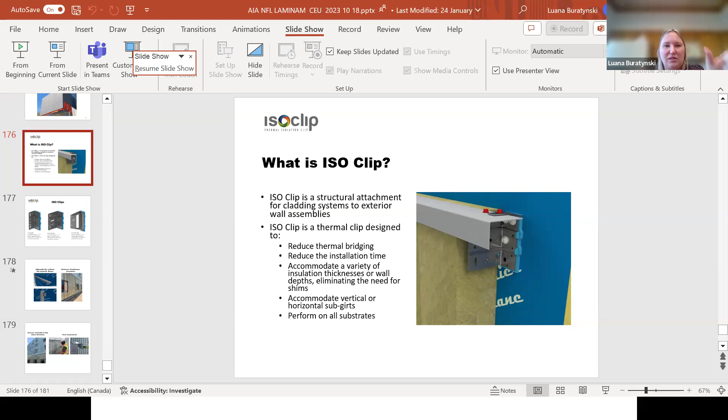With products you're choosing, I can just price out the material of just the facade system attaching to the subframing. We really want to promote continuous insulation and high performance, easy to install wall cladding through clips and rails with adjustability, so you can make sure your walls are straight through that.

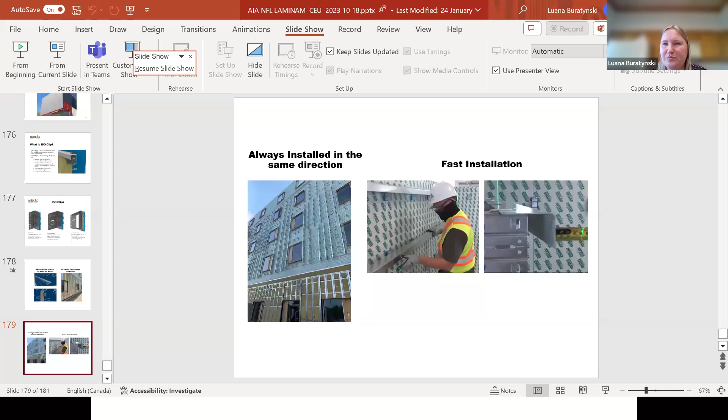As I'm just pulling up here, I want to highlight our American project, Roger Williams Gateway. This still not working.

Yeah, I think on that process video there, Luana, if you can send me the link once that thing gets working, if you know where it's at, I've got the list of attendees and we can send it out to everybody.

I can share a list of projects in the States that have used us. We've done a part of a medical building in Ohio. So it's very new to the North American market, the rain screen system, but there are jobs coming and being completed with onboarding as I continue the architectural work.